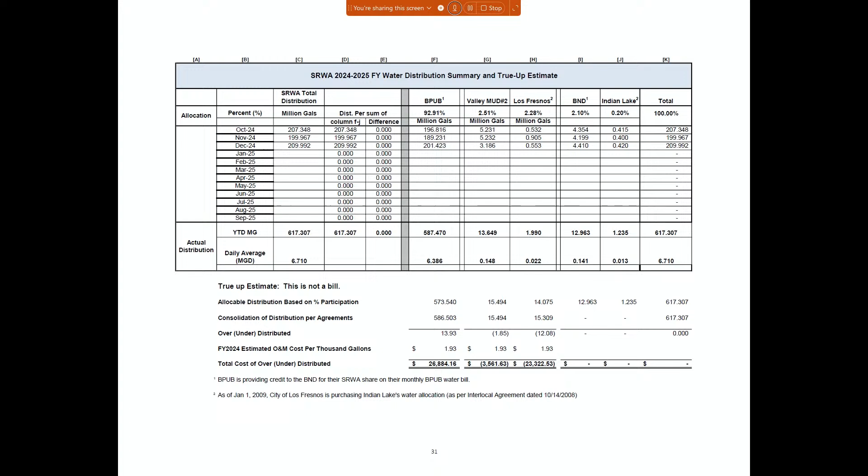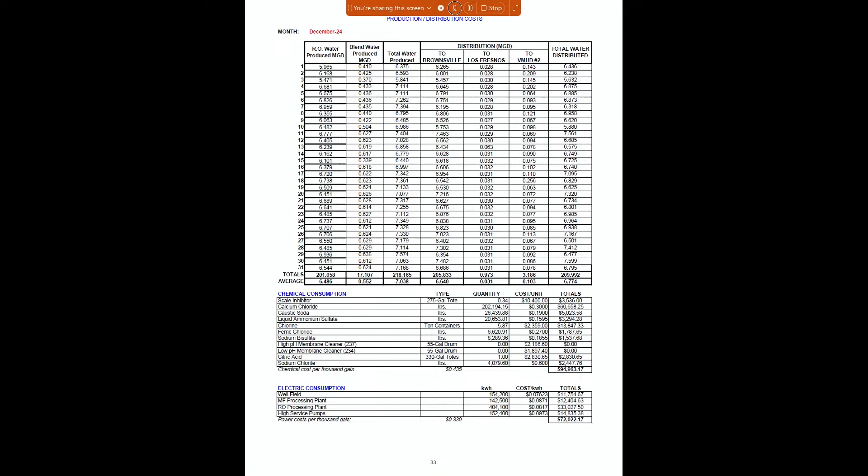In this following page, staff reports events that reduce the plant shutdown and the plant production. For this month, on December the 3rd, we have an issue with a microfiltration Ethernet switch, and we were down for 5 hours for that.

I know I've brought this up before, but that seems like a long time for something that is really so simple. I know there's the issue with troubleshooting and also having equipment off-site. We're at the point where it's not a big deal right now, 5 hours being closed down, but again, this is something to think about for the summer.

Having that much downtime, is there something that seems like the filtration unit failing because its switch has failed off? So it doesn't seem like a good failure mechanism.

Yeah, I guess it's important to know that SRWA doesn't have electrical technicians on site. So as soon as we see the issue, we initiate the process of procuring people to come down here. These instrument technicians, I think there's 2 of them, and they take care of 5 plants, 3 water plants and 2 wastewater plants.

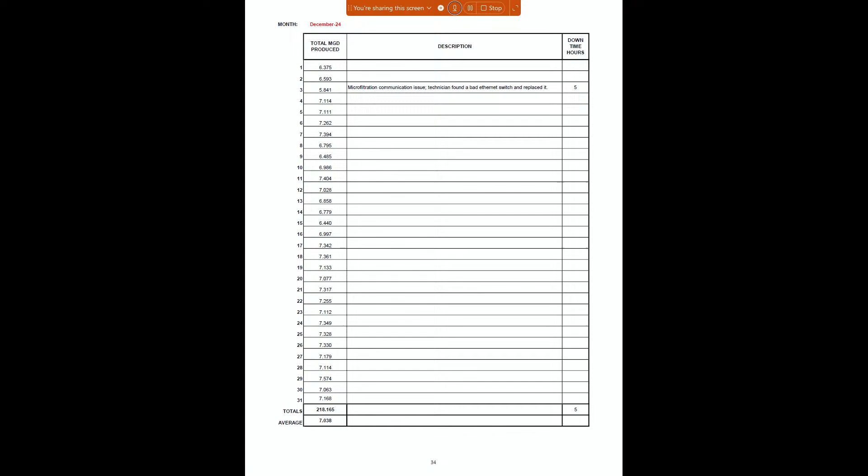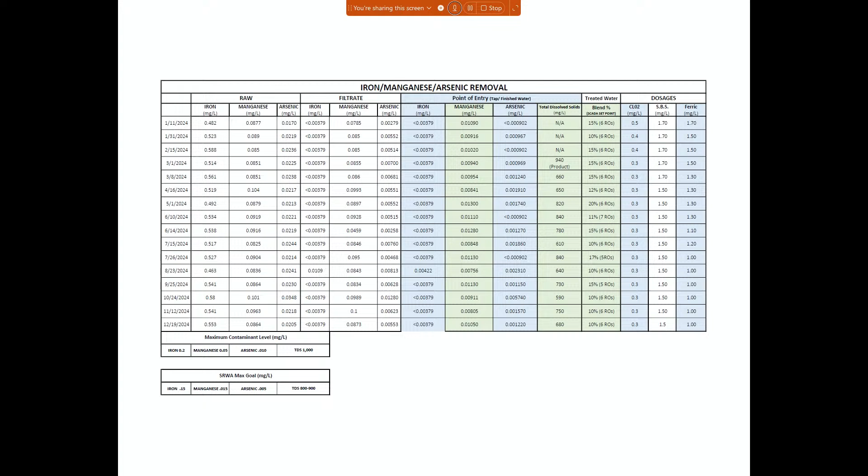This page is the monthly analysis that we obtained. As you can see, for December we're still meeting the TCEQ's MCL and our goal, which is more stringent. We're still under for iron, manganese, and arsenic. On this page, we report the pumps that were on when those analyses were taken, so we can know how different wells react to those analyses.

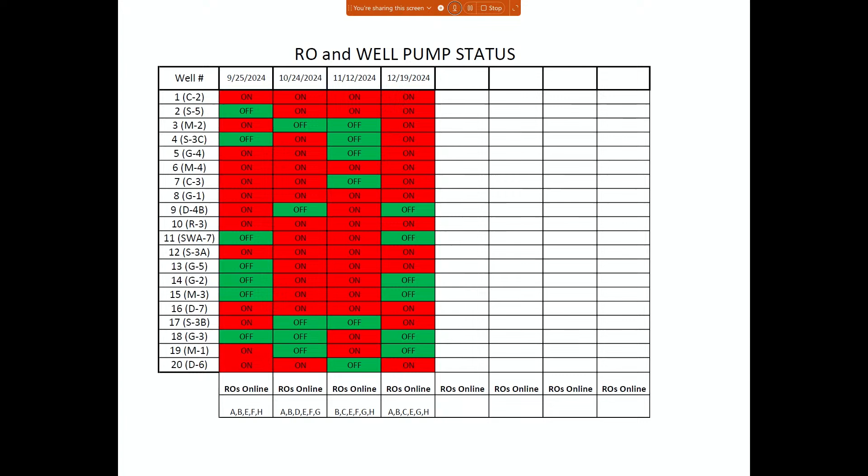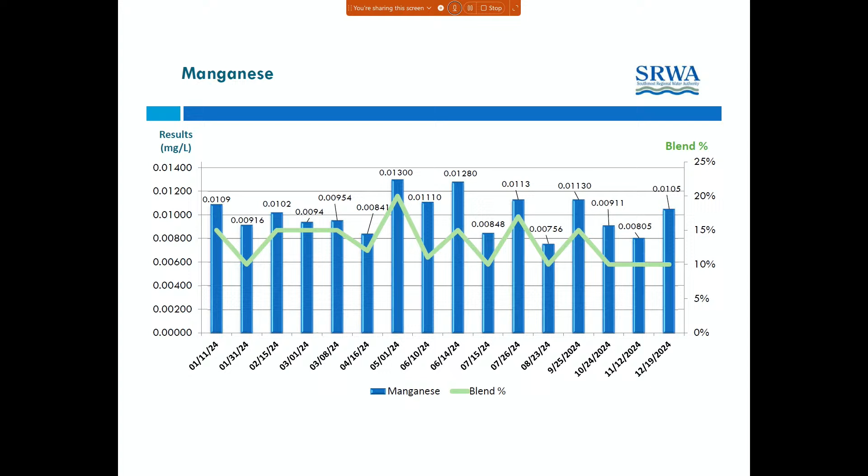On this page, we have the manganese levels according to the blend of water that we have. We've been at 10% blend, and we've been meeting the manganese MCL. The following page is the arsenic level, and again, at the dose we are at this point on chlorine dioxide, we're still meeting the MCL. The MCL is 0.010, and we're at 0.001. So we're good there.

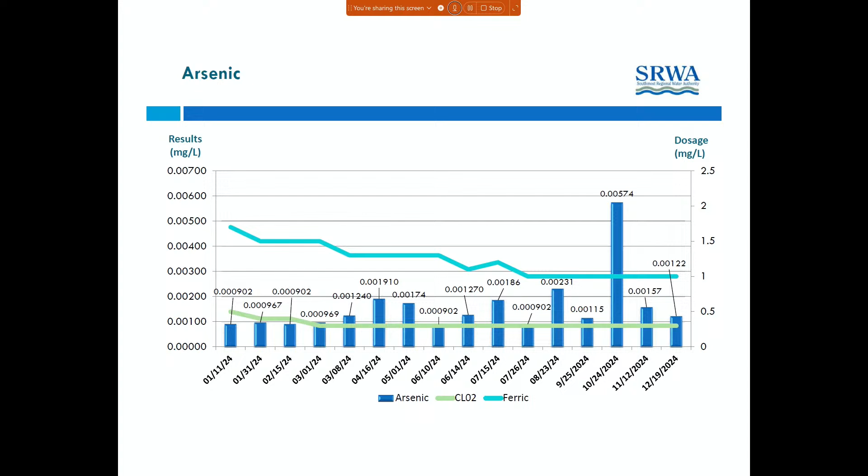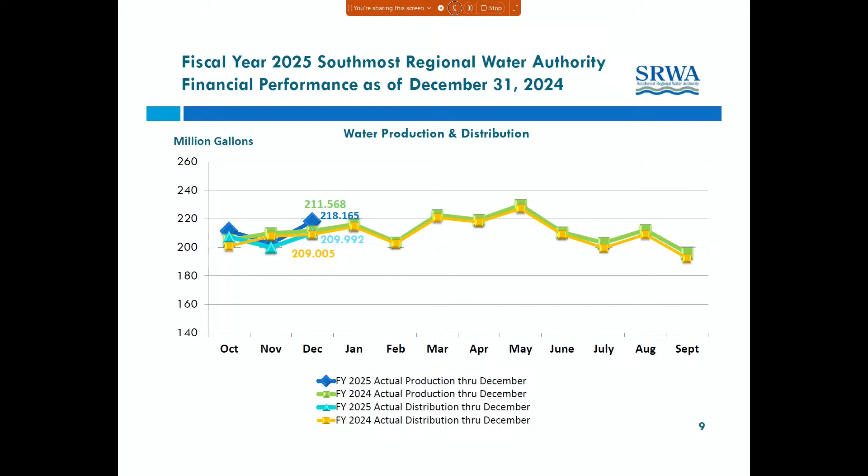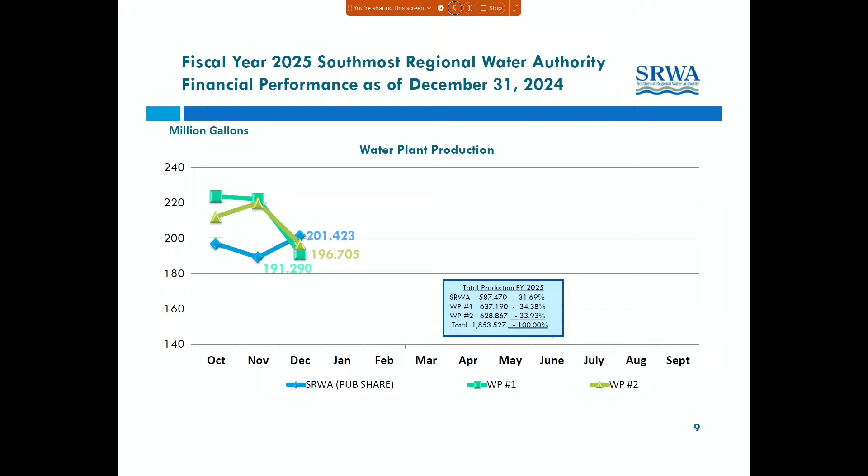Now we proceed to the financial report.

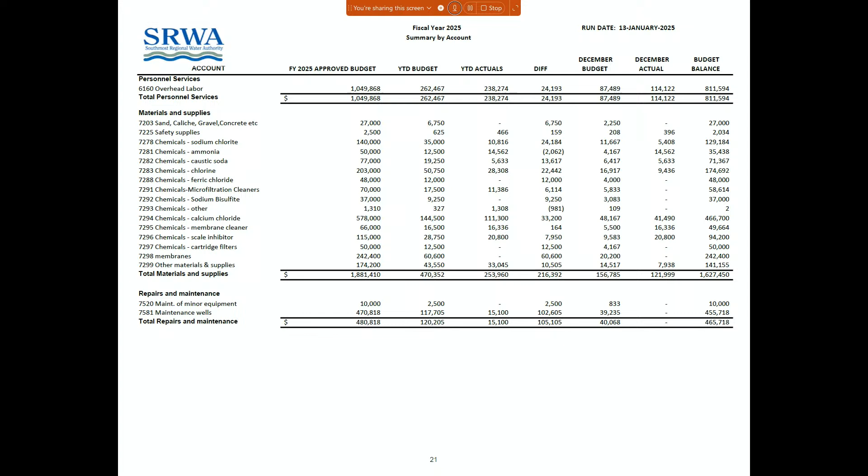The last two pages are the summary of budget and actuals, expenses by account. This is the end of the presentation. Any questions?

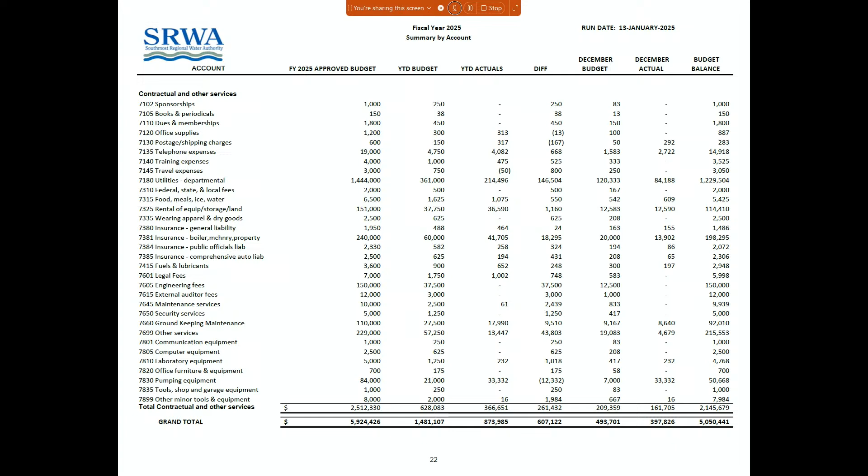Next on our agenda, we have item B, quarterly investment report.

Good afternoon, Mr. President and members of the board. My name is Mirian Camacho, Treasury and Accounting Manager for the Accounting and Treasury Department. I'll be going over the quarterly investment report for the quarter ended December 31st, 2024. This report is prepared for the SRWA in accordance with Chapter 2256 of the Public Funds Investment Act. The investment portfolio complied with the PFIA, the Public Funds Investment Act, and with SRWA's investment policy.

I'll be going over columns A, C, E, and F. Starting with the asset class column A, bank deposits with a market value of $1,250,130.23, a percentage of 9.27, and a yield to maturity of 4.15. Continuing with certificates of deposit with a market value of $2,619,000, a percentage of 19.42, and a yield to maturity of 5.32.

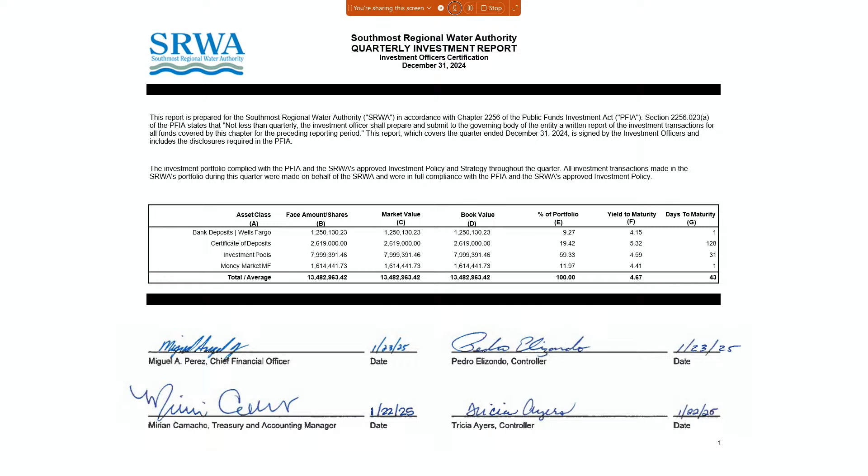This is detail of those investments just mentioned, with the bank deposits from lines 1 and 2 with a market value of $1,250,130.23, and it ranges from 1.65 to 4.17 yield to maturity.

Certificates of deposit, lines 4 through 14, with a market value of $2,619,000 and rates ranging from 4.55 to 5.60.

Continuing with investment pools from lines 16 and 17, with rates from 4.46 through 4.48, and Texas term investments ranging from 4.51 through 5.35, with a market value of $7,999,391.46.

And the money market mutual fund with a market value of $1,614,441.73 with a yield to maturity of 4.41, giving us a total market value for the portfolio of $13,482,963.42 with a yield to maturity of 4.67.

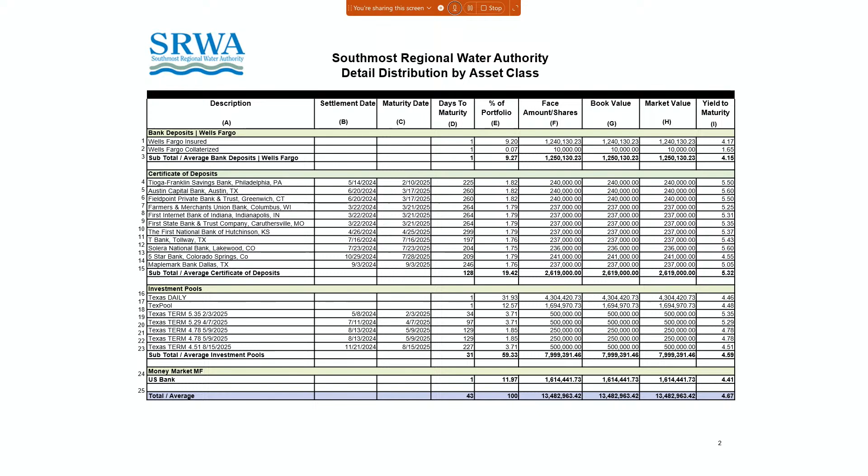Next item that we have is item C, SRWA grant activity update.

Good afternoon, Mr. President and members of the board. I am Miriam Suarez, Senior Grants Coordinator based out of the Finance Department, and this afternoon I'm here to provide an update on grant activity for SRWA.

I begin with a quick recap of fiscal year 2024, in which there were a little over $20.5 million in grant requests submitted through 3 applications, and a direct ask through the Congressman's Office of $40 million to be placed in the Water Resources Development Act that authorizes projects to be funded through a separate appropriations bill. I'll be going over each application.

The first application is the Wellfield and Brackish Groundwater Treatment Facility Improvements Project. This was submitted to the Bureau of Reclamation through its WaterSMART Desalination Construction Projects under the WIIN Act. The grant request was for approximately $10.6 million with a total project cost of around $42.4 million. The project scope includes the reconstruction of 20 existing wells, construction of 2 new wells, and facility improvements including electrical and RO modifications.

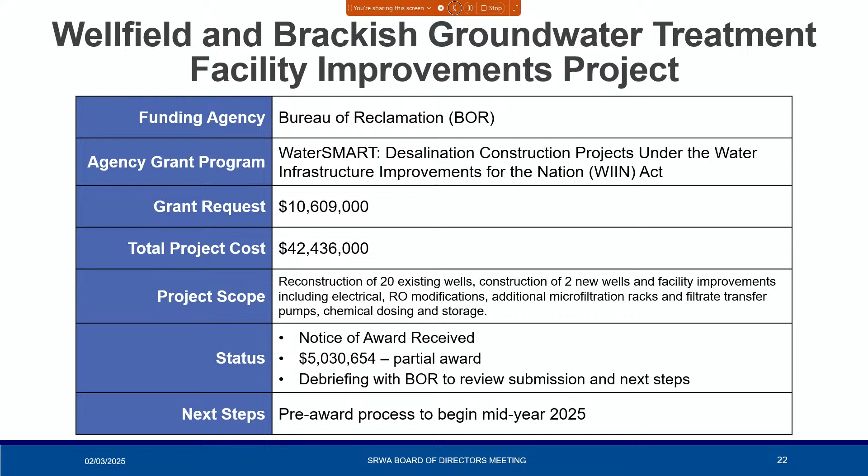The next application is the New Wells for Drought Resiliency and Groundwater Reliability Project. This is also through the BOR, through their WaterSMART Drought Response Program, the Drought Resiliency Grants. The grant request was for a little over $8.7 million with a total project cost of about $9.2 million.

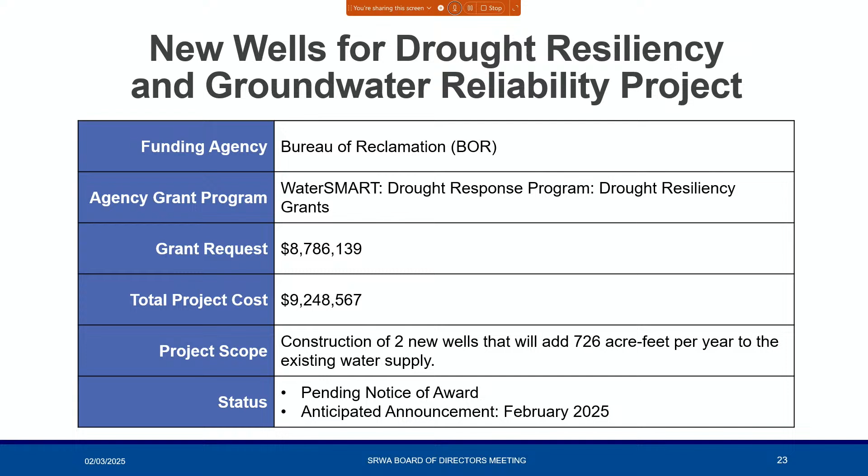The project scope includes the construction of 2 new wells that will add 726 acre-feet per year to the existing water supply. We are expecting a notice of award or an announcement sometime this month.

The last application submitted is for the Generator Improvements Project. This is through Texas Division of Emergency Management, through the Hazard Mitigation Grant Program. The grant request was for about $1.1 million, with a total project cost of $1.3 million.

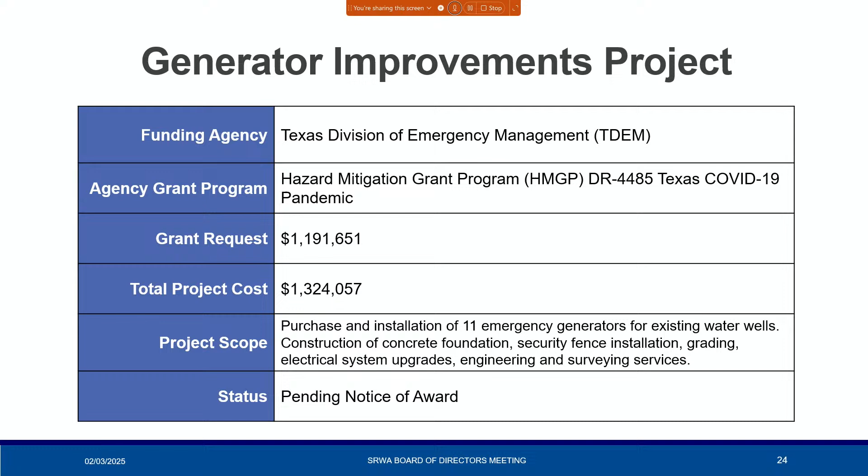The project scope includes the purchase and installation of 11 emergency generators for the existing water wells, in addition to the foundations and security fencing. We are pending notice of award for this, and there is no anticipated announcement date.

The last one is the SRWA Desalination Plant Expansion Project. As stated, this is through federal legislation, the Water Resources Development Act. The appropriation request was for $40 million, and it was for very general water and wastewater infrastructure development.

The act itself was enacted in December of last year, but funding for these types of projects approved through WRDA have to go through a separate appropriations bill, and so we are pending that. This concludes my presentation. Are there any questions? Thank you very much.

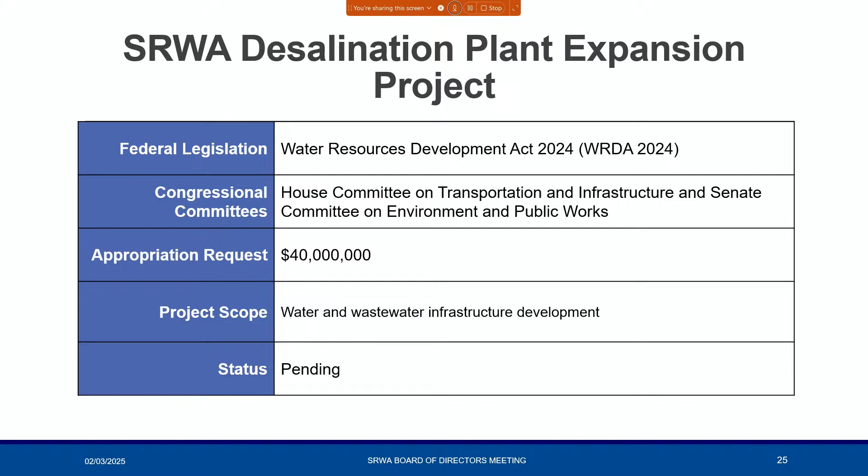Next we have item number D, the well field performance and well rehabilitation.

Good afternoon, Mr. President, members of the board. My name is Michael Esquivel. I'm a lead operator here at SRWA, overseeing the well field. My presentation is going to be on well field performance and well rehabilitation. We're going to watch a short video of what a well is.

Wells are used to extract water from aquifers. A well is a long tube that penetrates the aquifer.

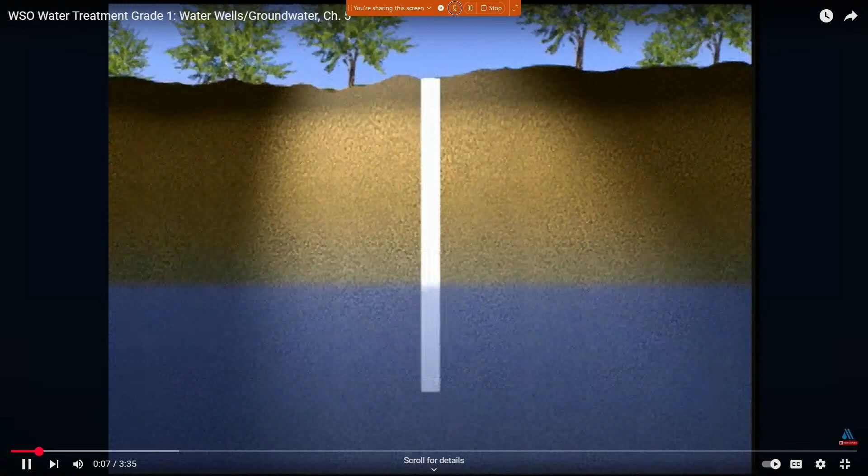The well casing is a lining for the drilled hole that seals out contaminated water from the surface and undesirable water from formations above the aquifer. The casing also keeps the aquifer materials from going into the well and collapsing it.

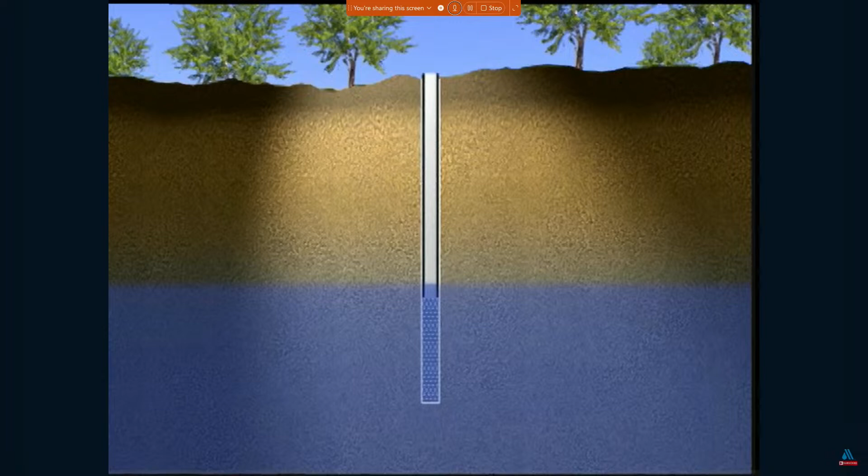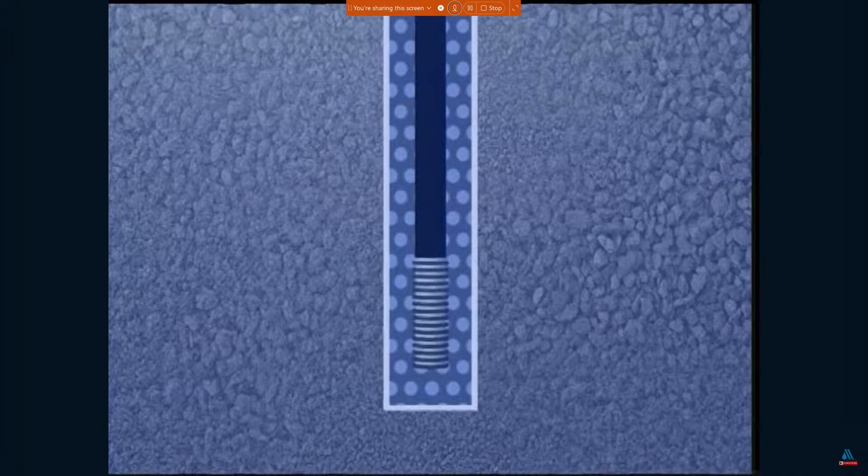Inside the casing is the column pipe. The column pipe is where the water actually travels from the aquifer to the surface. There is often a well screen on the bottom of the column pipe.

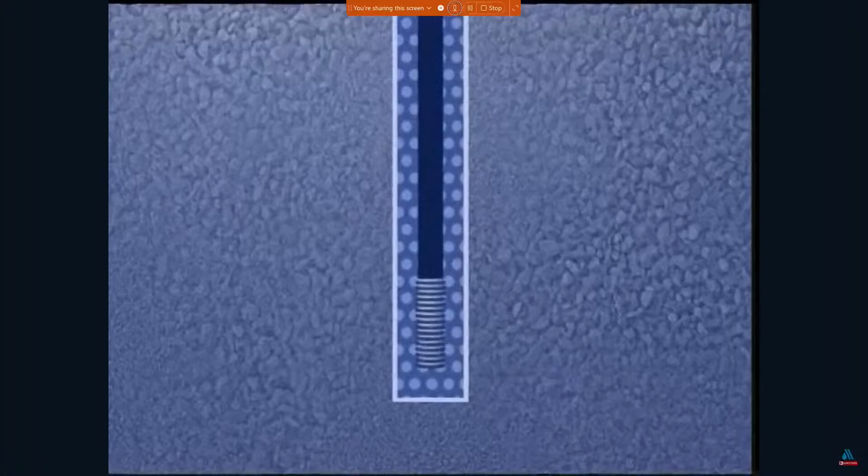Wells rely on pumps to move water through the pipe. The pump may be located on the surface above the well, or it may be installed at the bottom of the column pipe. Pumps move water from the aquifer to the surface. In doing so, the aquifer level near the well tends to decrease, or draw down. Large drawdowns are harmful and usually mean the well is over-pumping the aquifer, or there are problems in the well.

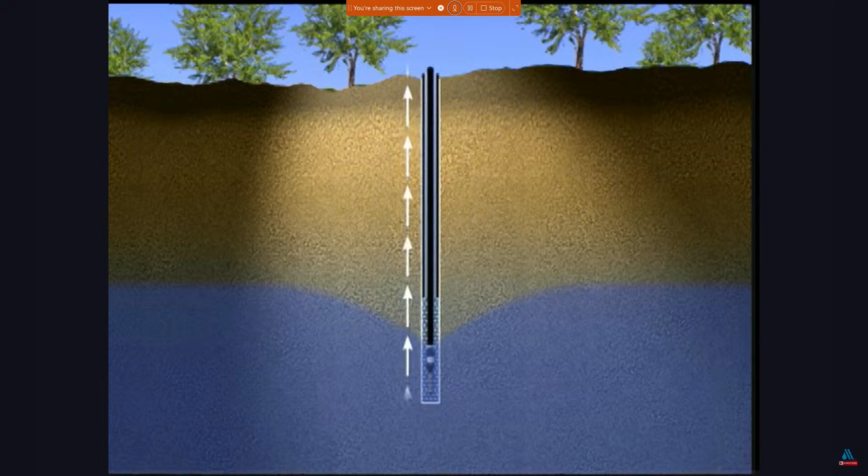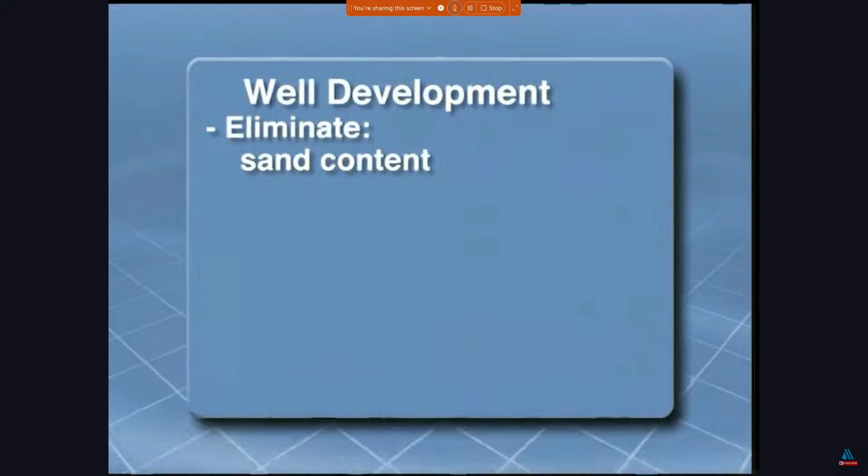After the well is constructed, it needs to be developed. Well development is necessary to eliminate sand content, silt, and turbidity in the well, and is an integral part of the construction. Disinfection is also needed upon well completion and every time the well is entered for maintenance.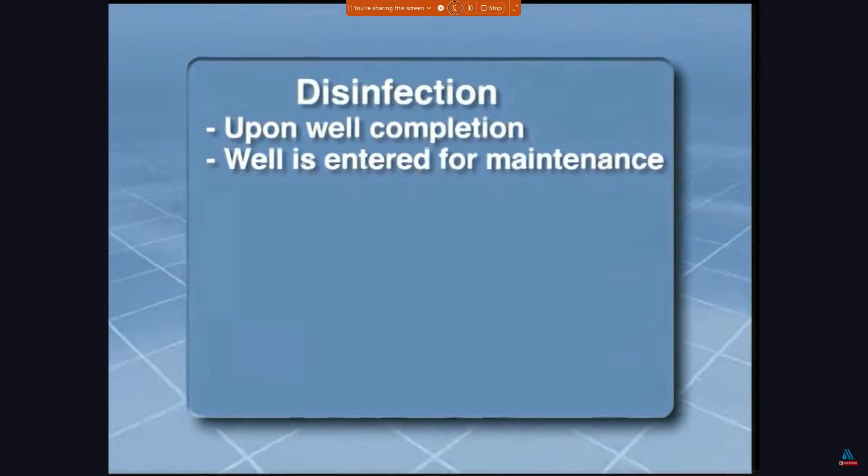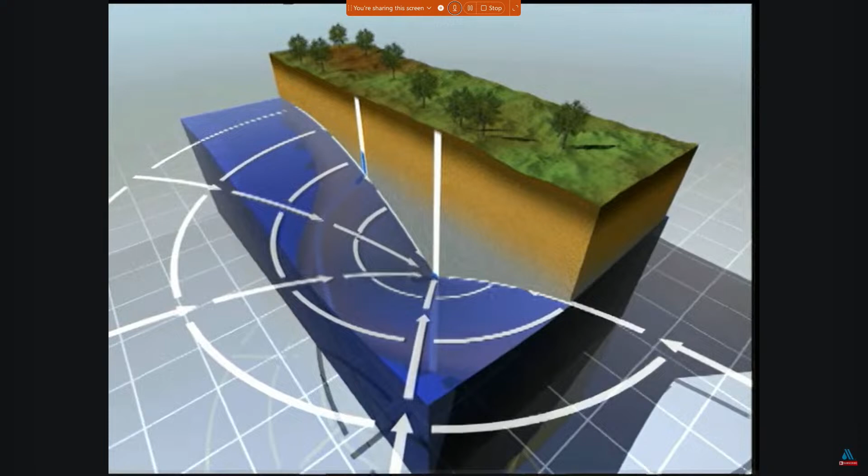Ongoing efforts should include management of land uses surrounding a well or well field. Water moves to the well in the cone of depression. The radius of influence is the distance from the well over which some form of drawdown occurs. Drawdown will affect other wells, so care must be taken not to cause other wells to go dry by overpumping.

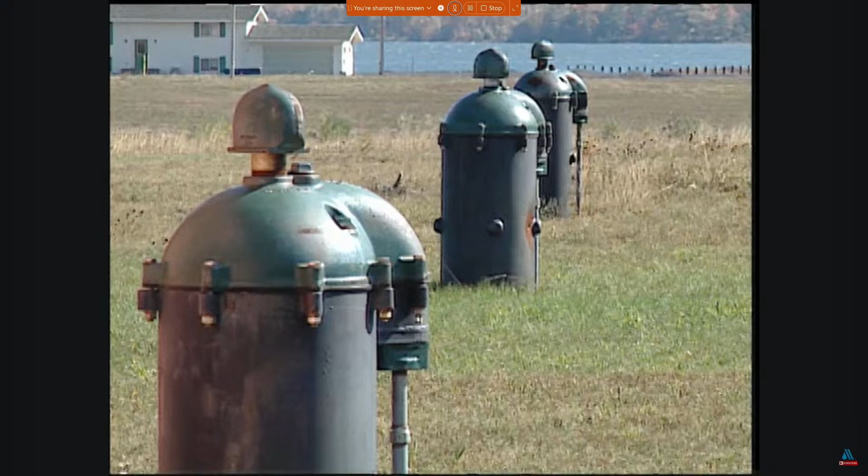A well field occurs where many wells are located within close proximity to one another. The drawdowns overlap, so wells must be spaced to prevent mining of the aquifer.

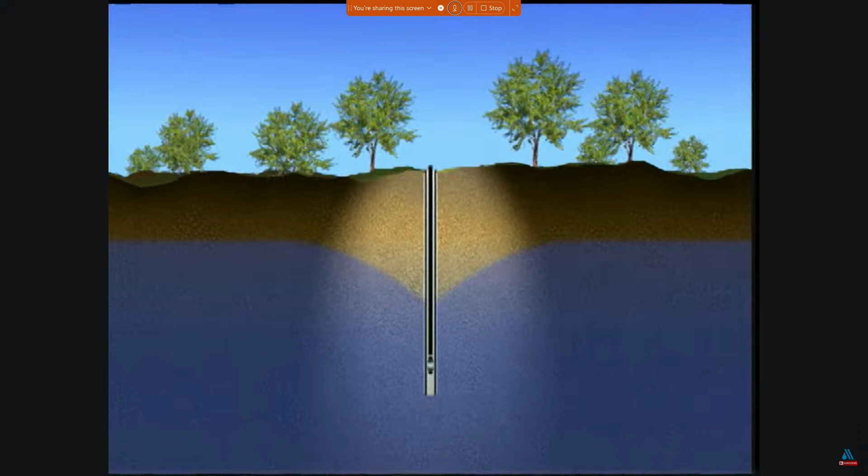The aquifer level in the vicinity of a well may recede seasonally or during long dry periods when recharge to the aquifer is at its minimum. The installation of additional wells in an area with overlapping cones of depression can also cause the water table to recede. A submersible pump is a turbine pump with its motor close coupled beneath the bowls of the pumping unit.

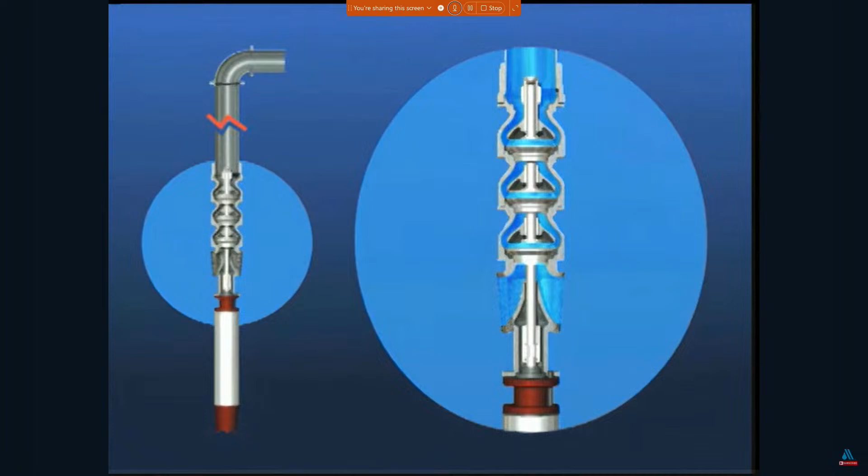The entire unit is installed underwater. The pump motor is cooled by water flowing vertically past the motor to the pump intake. These are the most common pumps for wells over 20 feet deep.

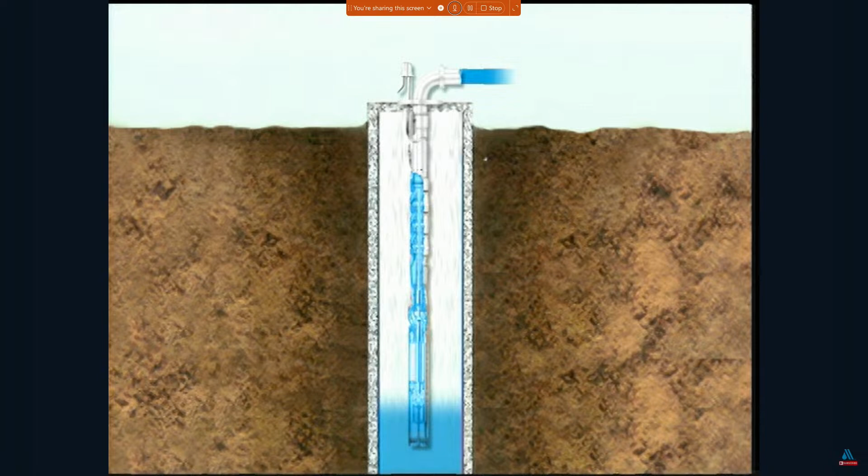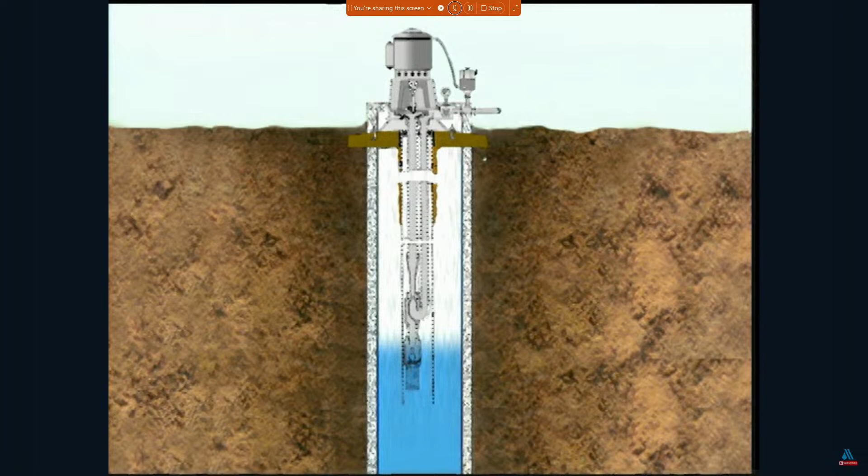A rotary pump combines the positive discharge characteristic of the reciprocating pump with the constant, steady discharge of a centrifugal pump. Impulse pumps produce pumping action by directly applying pressurized air or water into the well below the water level to force groundwater to the surface.

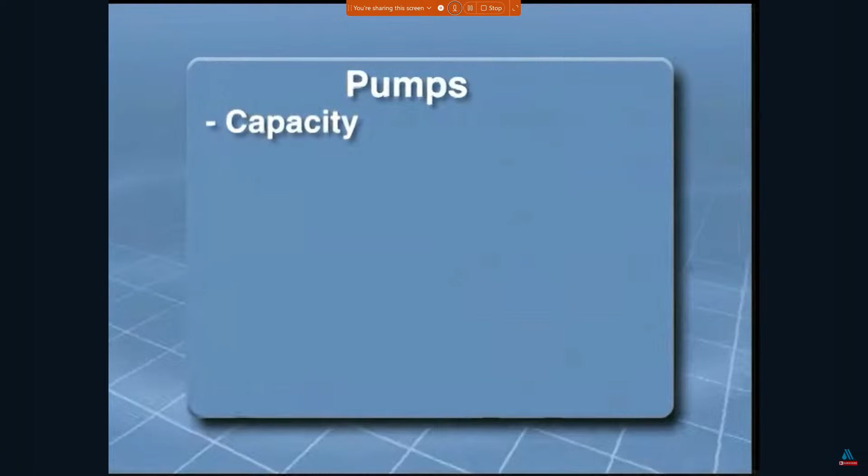Pump selection primarily depends on economics. The type of pump selected should give the best, most economical service. Factors to be considered include capacity, depth of well and pumping level, inside diameter of the well, condition of the borehole and whether it is straight or crooked, chemical and abrasive properties of the water, friction loss, and type of available power and costs.

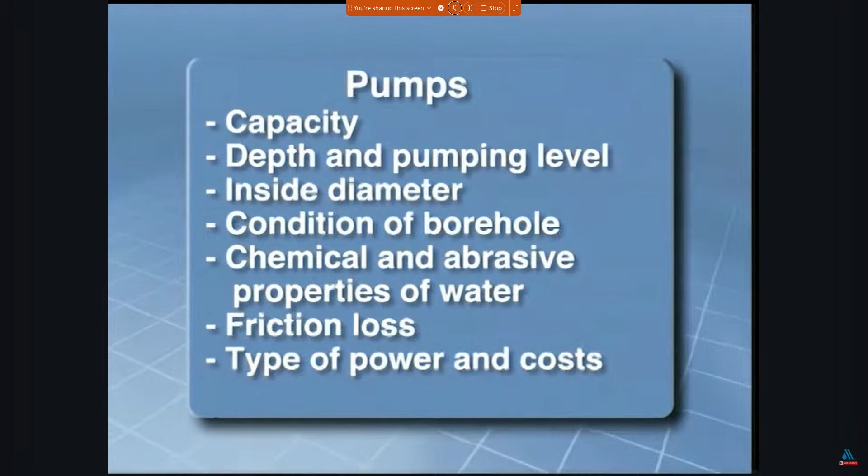Wells usually provide relatively consistent, maintenance-free water supplies over many years.

Okay, so that's what a well is. Here we've got some definitions.

GPM is gallons per minute. Static level is the water level when the pump is off. Pumping level is the water level when the pump is on. Drawdown level is the pumping level minus the static level. Specific capacity is the rate of well yield per unit of drawdown, calculated as gallons per minute divided by drawdown, giving you your specific capacity.

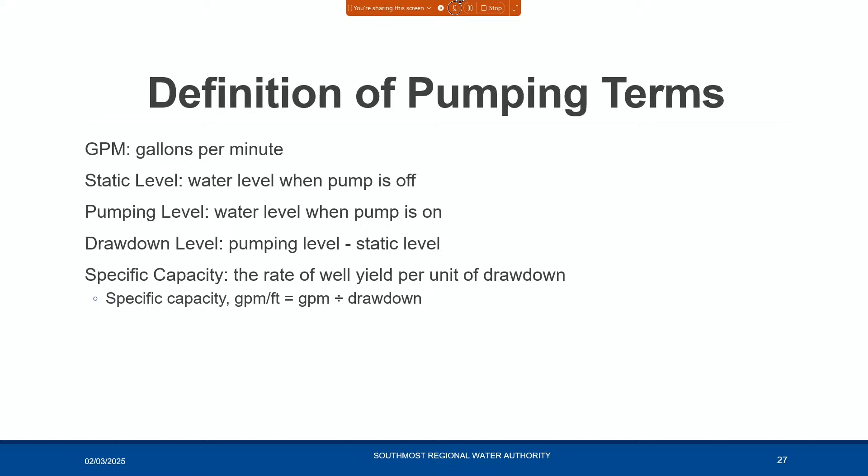So in this presentation, I'll be talking about well performance.

This is a picture of the inside of one of our wells on the left. Here at SRWA, we have 20 wells in our well field, dug to about 300 feet each. The picture right next to it is the layout of the well field. It rests along Rancho Viejo, a little bit north of Rancho Viejo. These wells pump between 350 gallons per minute all the way up to 700 gallons per minute.

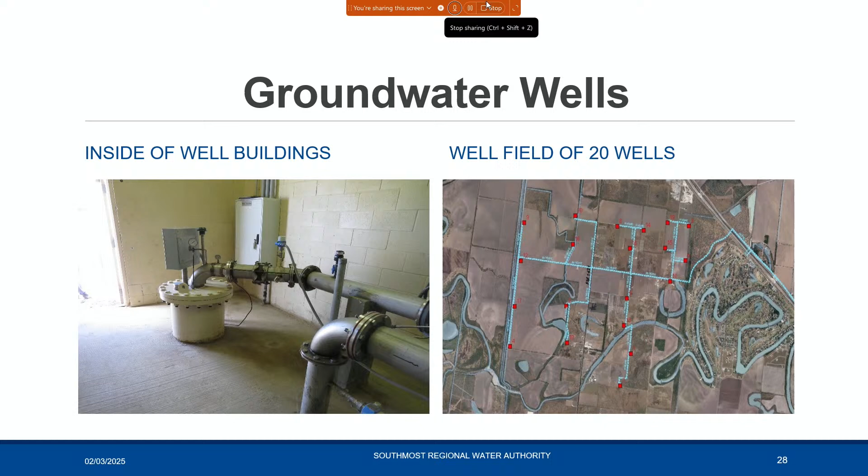This is a chart of our specific capacity over the years. To the very left is 2004, that's our baseline specific capacity for each well. Over the years, what starts happening is that specific capacity starts to decline, meaning our level in our well, we're having to pump lower than where we were originally.

Originally, if our well only had to pump 20 feet of drawdown, that was giving us our 350 gallons per minute or 400 gallons per minute. Now it's pumping all the way down to about 120 feet, meaning there's restriction in that screen, not allowing that water to flow through the way it was before.

Here on the far right is the 2024 specific capacity decline. Each well is listed here, and on average, we've lost about 65% of our specific capacity across our well field.

The wells highlighted, well 7, well 17, and well 18, were chosen for rehab. They were rehabbed back in 2020. We were hoping for significant regain of the capacity that was lost, but the capacity we gained was only 4 to 8% recovery.

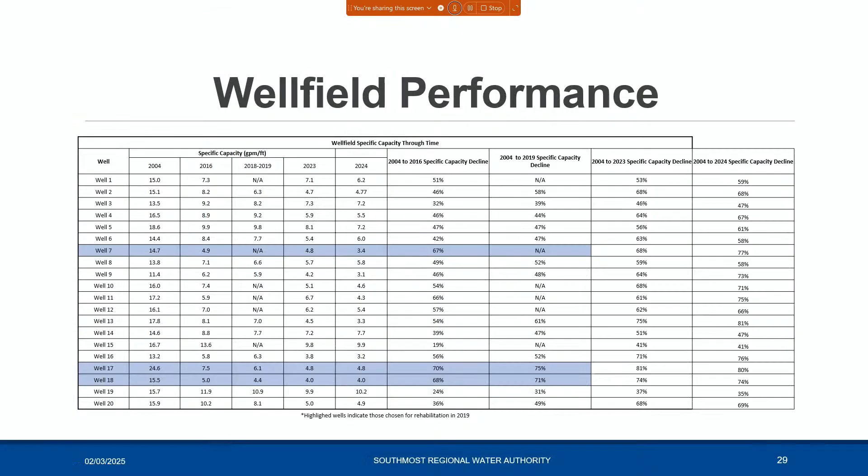This next slide here, on the left-hand side, shows the different types of wells. We have the non-flowing artesian well. This is what we have here. We're tapped into a confined aquifer, and this dotted line shows us the static level - how much water is pushed up from that confined aquifer, basically leveling off with the inlet of that recharge area, located further west of the Rio Grande Valley.

This is an unconfined aquifer well, so it doesn't go into the confined areas. It's just on top of the water table, so whatever level that water table is, that's where it's going to level off. This is a flowing artesian well - if your ground level is lower than where your inlet's coming in, the water is going to come out of the ground.

To the right, this will show you the cone of depression, how a pump works. You have your water inlet coming in through the screens. This is a confined layer, and your static level is up here. Once you turn on that pump, your level is going to want to decrease down to where it finds the equilibrium of amount of water coming out of the well to what's coming into that well. So if we're throwing out 700 gallons per minute, we want 700 gallons per minute coming in through the screen, so it's going to bring it down to a certain level. When we first started, our level was up here, and over the years it's been just declining.

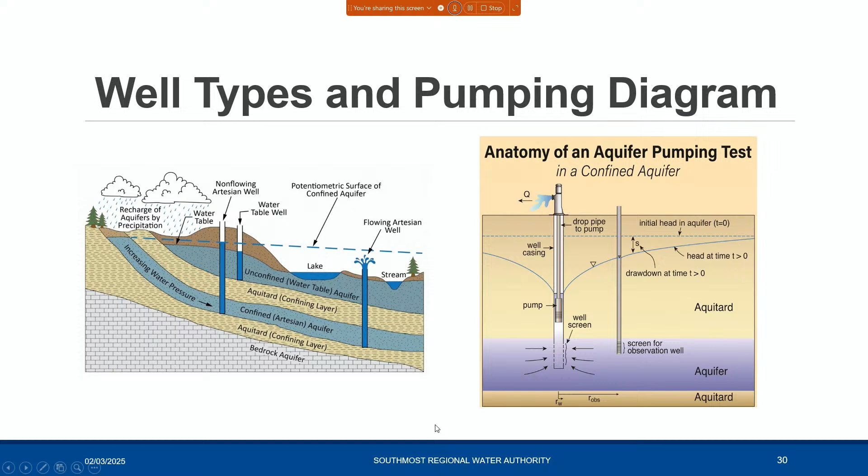Now, the common method is an acid wash. We did the common method back in 2020 - basically chlorine, though there are harsher acids used. We did 3 wells and a scrubbing. You throw your chemical into that well column and brush it, which takes off all the scaling that might be on the screen. But the issue is it's not only the screen we have to worry about - we have to worry about that gravel pack outside of the screen. As water flows in through that screen, it brings in any type of silt or sand from the formation itself, and eventually it starts compacting into that gravel pack, restricting the flow in.

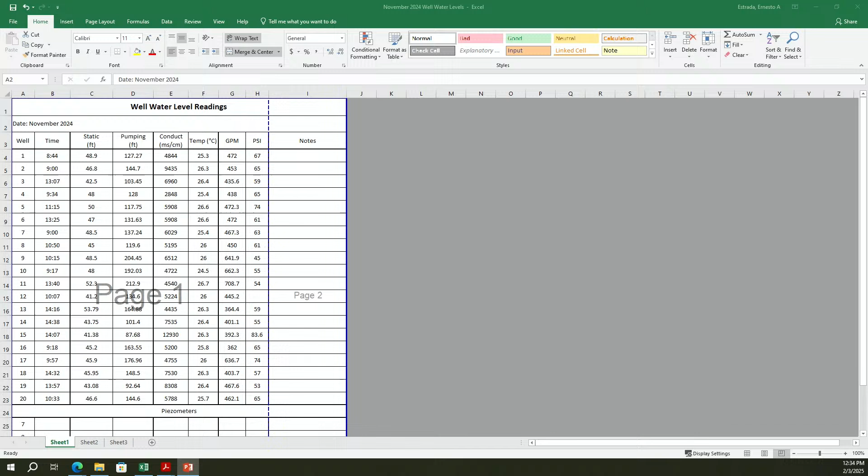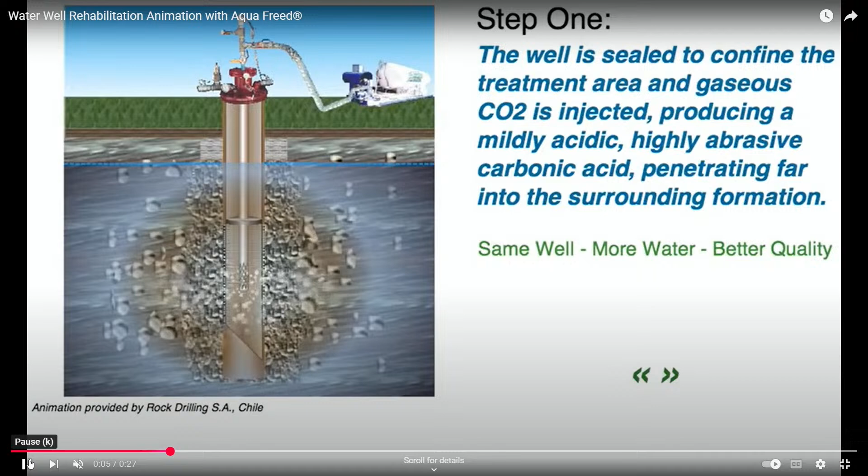Step two: liquefied CO2 is injected into the well and surrounding formation, where it expands rapidly, producing the necessary energy to detach, dislodge, and remove mineral encrustation and biofouling.

Have you all seen those Mentos thrown into Coke? What happens? It spurts out. Well, it's the same type of method, but we're going to cap the top, and since that screen is open at the bottom, all that energy is going to want to be pushed out the bottom, pushing out any fouling of the gravel packing. So anything that's built up hard in there should break up and get thrown back out.

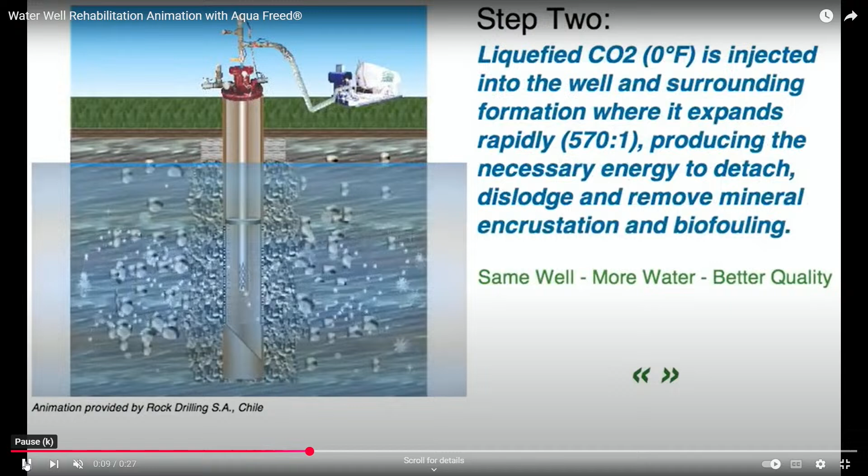Step three: CO2 is released and the well is mechanically developed using pumping and surging to remove the newly dislodged plugging material from the well formation.

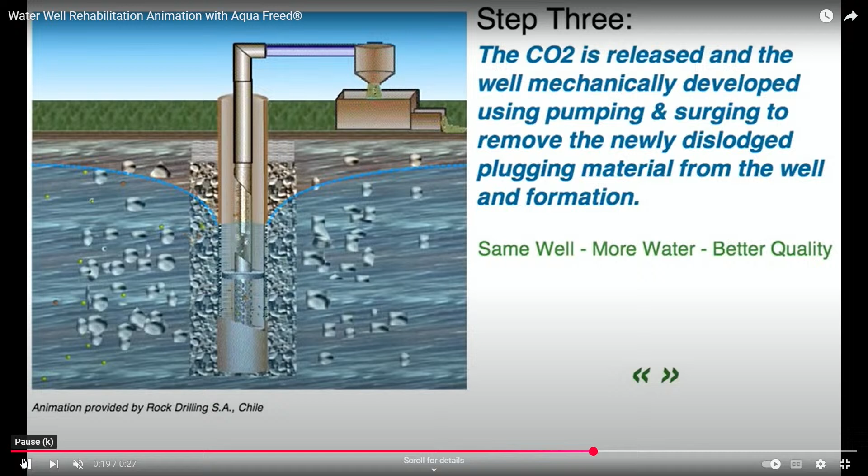Step four: the well pump is reinstalled and the well returned to service, providing an increased supply with no hazardous waste stream to dispose of. I believe in 2022, our project was placed on hold due to a hazardous waste stream issue. We weren't sure what to do with it, but this way we can just dispose of it on the ground.

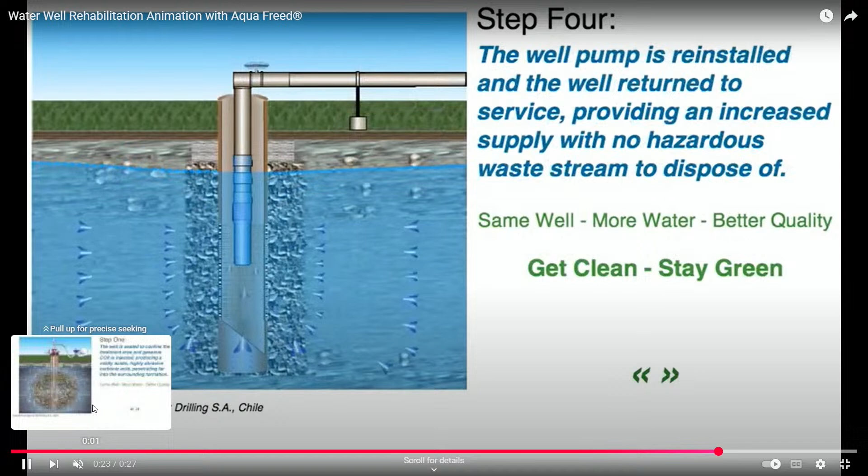That concludes my presentation, if there are any questions. Thank you very much for this time—do you all have any questions? Okay, I'll just ask what I asked before, just say it publicly.

I don't remember this being part of the optimization study, am I wrong? Was this mentioned in that, or is this something that has since been brought to our attention?

Yes, it was. There were some questions from the board members at the last board meeting about the wells. I think Gabriela is the one who was asking about it. I'll probably reach out to her and see if she wants to sit down so we can go over it. Yeah, I think that'd be a great idea.

I mean, but this particular method of treating the wells and reopening them, I don't remember that being part of it. No, this seems like a new piece of technology that has been brought to us.

It was something that we were looking into. Instead of doing the traditional methods, which we tried before and weren't very successful, we found this—I think it's out of New York or New Jersey—that they can come down and subcontract with a local Texas well driller to help us do this. So it is a new technology that wasn't proposed before, but if it works...

If it works, it'd be great. Have we talked to our consultants? Geologists? Yeah, our geologists and such. Yes, and they think it's worth a try, mechanically. He's reached out to the well driller that did a few wells here in Texas, and the driller did say that the SRWA wells are a good candidate for this type of method.

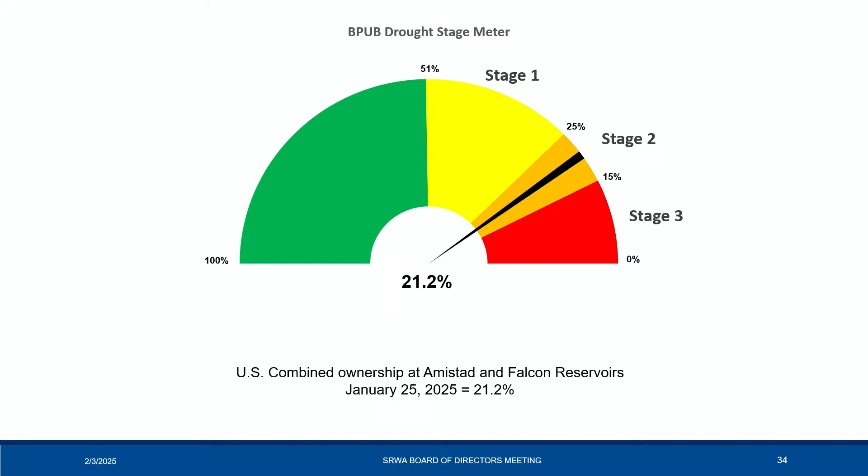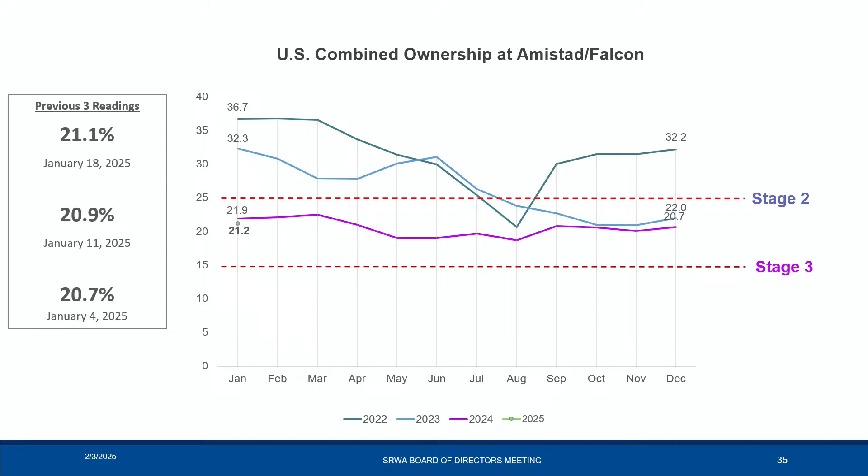Again, you can see the previous 3 readings. January is 20.7, January 4th, January 11th, 20.9, and January 18th, 21.1%. So it is slowly creeping up, but again, it still keeps us in stage 2 drought restrictions.

We did receive information from the National Weather Service, February to April 2025 outlook for the Lower Rio Grande Valley and Deep South Texas region. February to April 2025 is expected to average out warmer and drier than normal. There still needs to be monitoring for the potential for heavy rainfall and flooding events during this time period, despite a drier than normal outlook. Given the right setup, showers and storms could result in heavy rainfall flooding, favoring late March and April if they occur. Dryness conditions will continue to expand through the rest of the winter and early spring season. Confidence remains high that the total combined storage will remain at or near record lows for March, which means continued limits on agricultural and municipal water use.

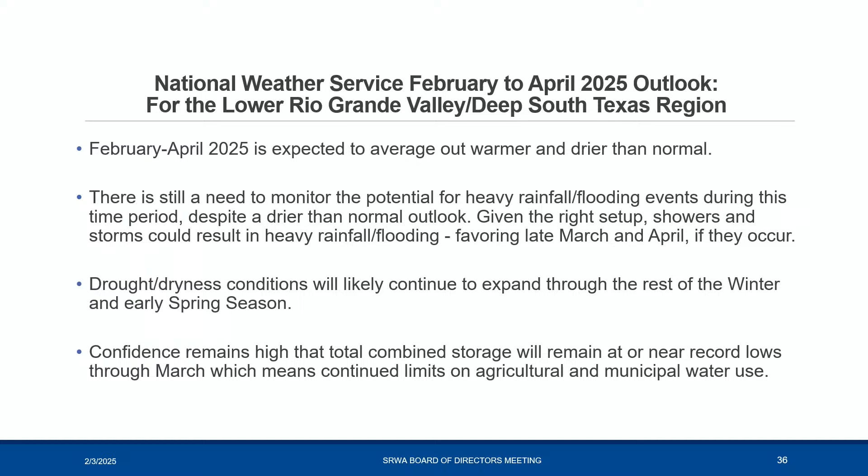And that's it. Any questions, folks? No, I think we're set. Thank you, guys. And I think that concludes our update.

On to item number 3, the consideration of submission of a letter regarding deficient water treaty deliveries to public officials.

Thank you, Mr. President. Enclosed in your packet, we have 3 different letters going to various different officials within the federal government. The first letter is to the Honorable Marco Rubio, who has just recently been designated as Secretary of State. We sent a similar letter a little less than a year ago to the previous Secretary of State. The second letter is to the Honorable Ted Cruz, our state senator for Texas, and the third letter is also for the Honorable John Cornyn.

All 3 letters state more or less various different things on there. This is really in reference to what is known and referred to as the 1944 U.S.-Mexico Treaty, under which Mexico has an obligation to deliver approximately 1.7 million acre-feet of water to the United States over a 5-year cycle, an average of 350,000 acre-feet per year.

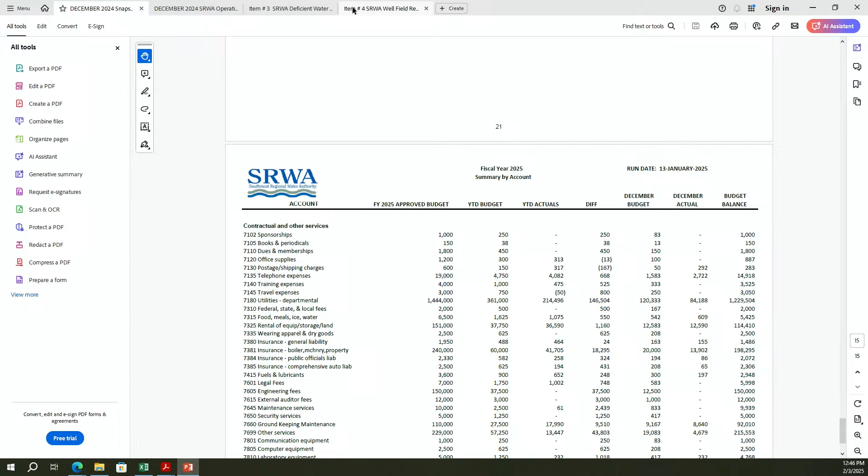Mr. President, members of the board, the Southmost Regional Water Authority operates a series of wells that serve as critical infrastructure for water production in the region. Over time, these wells have experienced a decline in performance, reduced water yield, and pumping efficiencies due to mineral scaling, biological fouling, and sediment buildup.

In 2020, SRWA rehabilitated three wells, well 7, well 17, and well 18, using the traditional method of brushing, chemical acid cleaning, pumping, and surging. The traditional method of rehabilitation resulted in a specific capacity increase of between 4 and 8%.

RW Harden & Associates Inc. and SRWA are proposing to rehabilitate 2 wells using the Aqua Freed carbon dioxide injection method. According to Subsurface Technologies and their references, this method is effective at removing mineral incrustation, biological fouling, and physical plugging. Subsurface Technologies holds the proprietary rights to utilize the Aqua Freed injection method.

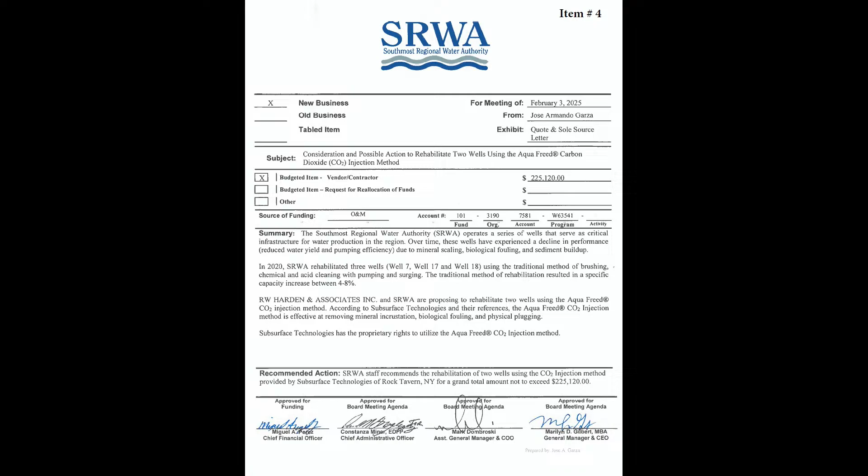Okay, last action item is the time and date for the next meeting. We have the next meeting for SRWA board meeting scheduled for March the 3rd, and for reference, on March the 10th, we need a committee board meeting.

Any other questions or counters or subsequent items for us to go over? I think we're good. So I don't think we need to do anything on that, right? We have the SRWA board meeting schedule that we have on here. If there's any conflicts or commitments from your other specific boards, please let us know and we will try and bring it up and address it for next meeting.